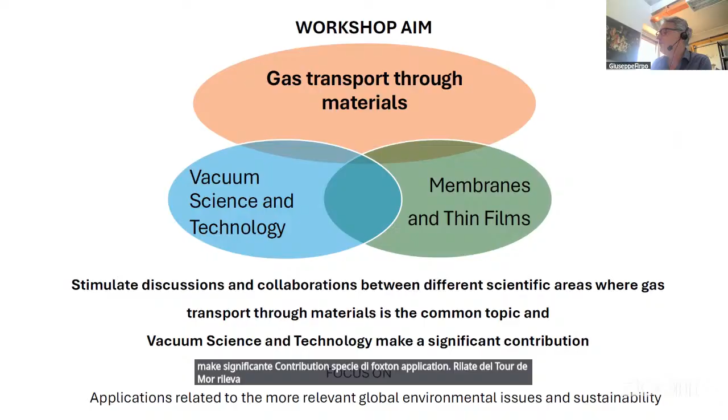The workshop aims to stimulate discussion and collaboration between different scientific areas where gas transport through materials is a common topic, and vacuum science and technology make significant contributions, especially focused on applications related to the more relevant global environmental issues and sustainability. These are the main topics.

Gas transport models, a theoretical part with dense and porous materials, phenomena of absorption and desorption at surfaces, and then applications in vacuum science and technology like insulation, component characterization, and outgassing, as well as in membrane and thin film technology, for example hydrogen storage, CO2 capture, gas separation, food packaging, and so on.

This is just a quick reminder.

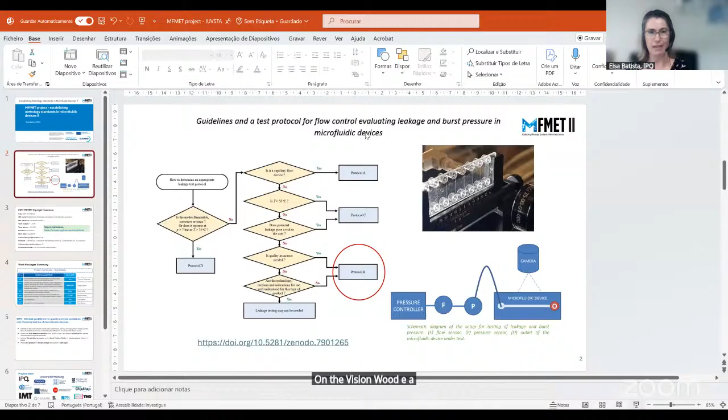Your question is interesting because I can answer in two parts. First, you are correct, I am the coordinator of a project entitled Establishing Metrology Standards in Microfluidic Devices.

This is the second time we got funds for this project. We had a project that lasted 3 years, ending in May last year. Now we got funds again from EURAMET, the European Association of Metrology Institutes, to continue the investigation in this work. In the previous project, as you can see from this slide, we developed a guideline for testing leakage and burst pressure in microfluidic devices.

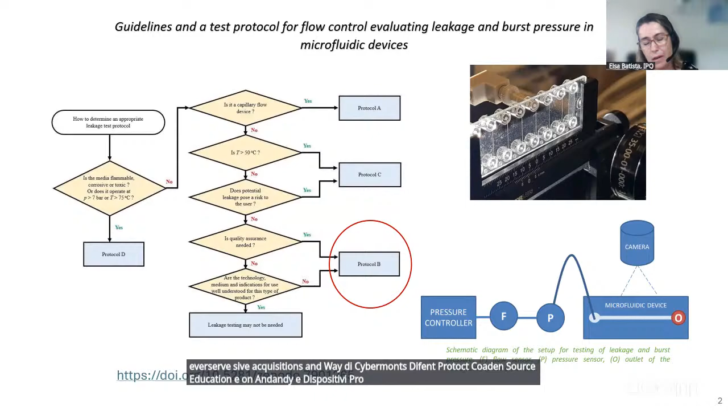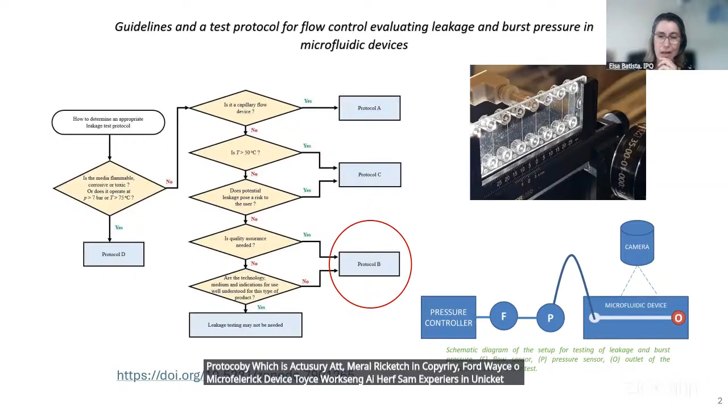So as you were saying, I have some experience with leakage of liquid in microfluidic devices made of polymer, which is Topas, and also made of glass and PDMS. From this protocol, we actually measured

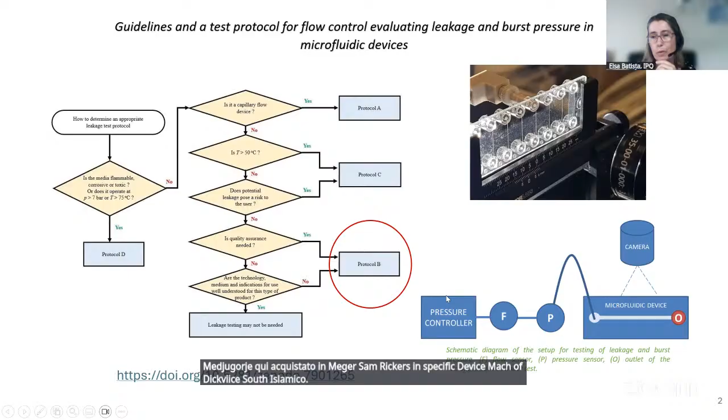This work was actually one of the deliverables of the project, and there is a link here where you can get all the information. So I have some theoretical experience on leakage, mainly in liquids, but in gas I actually don't have any.

It was interesting that you gave me this challenge, because I could see that it really fits within this new project, which is the second part of the MFMET project, and it has just started.

We have some... I think Federica, we need to, can you mute her, Giuseppe? Yeah.

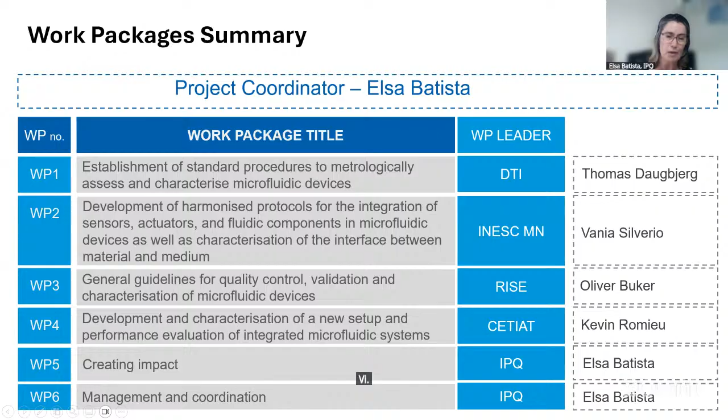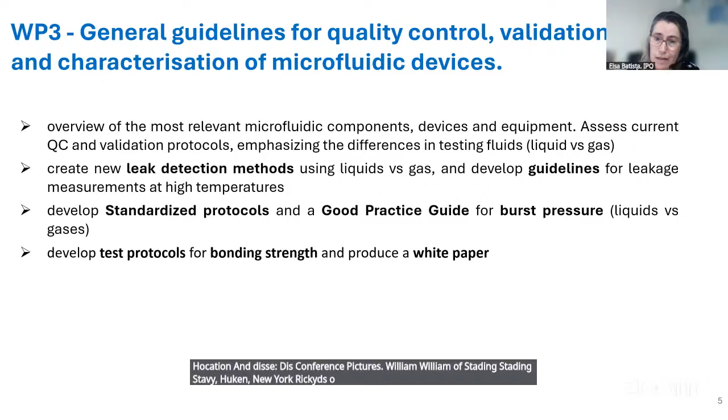For this project that just started in June, which I'm also coordinating, we now have one work package on general guidelines for quality control, validation, and characterization of microfluidic devices. Within this, we have a specific issue: leak detection methods using liquids versus gases, and developing a guideline for measurements at high temperature. This is where it fits with your question and this conference, because we are starting to study how we can measure leakage of liquids using gas, and then make theoretical calculations to convert leakage from gas to liquid. So we'll have a special work package related to this.

It's something new, we've never tried it before, so it's completely new. We just started the work. In my presentation in October, I think I'll have more information to give you, because we will start the investigations now, and within six months I think we'll have more to show you. But at least I can show you the part on liquid leakage — that is something we have already done.

For gas it's really new, but we're very excited, and we have a lot of experts from PTB in Germany, and also INRIM in Italy, who are really used to working with gas. We're talking about leakage on the order of 1 microliter per hour or less — very small quantities — and they are used to measuring this kind of flow rate for very small quantities.

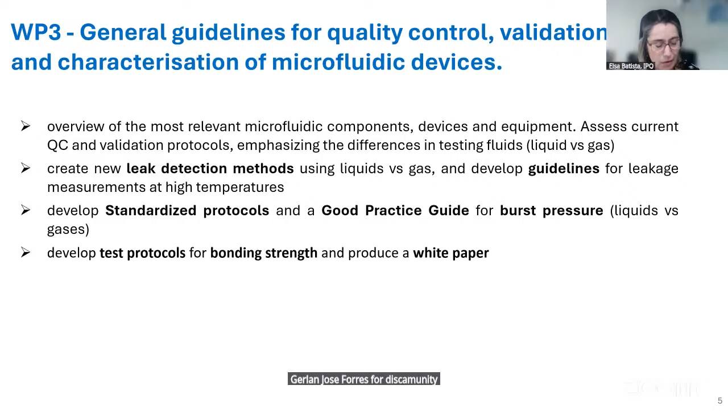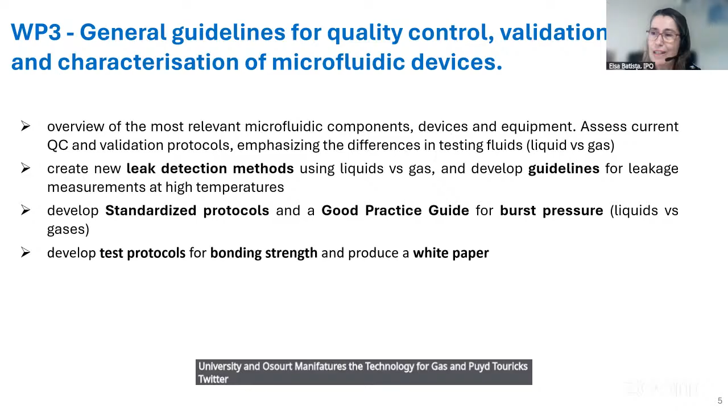So we're now going even smaller. It's a challenge also for us, for this community of national metrology institutes, universities, and also some manufacturers of chips, to try to take the technology used for gas and apply it to liquid leakage, and see if it works. It's really a challenge and a risk we are taking. But maybe even during this workshop or conference we can get some ideas in case we're not following the right path. So my presentation will focus on two things: first, the part on liquid leakage, and then the challenge of liquid versus gas.

Thank you, Elsa. It's very interesting, and I'm looking forward to seeing you in Portofino next October. Very interesting.

If Hajime Yoshida is not still with us, I can introduce Paolo Chiggiato. Paolo Chiggiato is a vacuum and material engineer at CERN, Geneva, Switzerland, where he holds the role of Deputy Head of Technology Department, Group Leader, and Program Coordinator of the Einstein Telescope, with recognized international experience in vacuum technology, thin films, surface finishing, and thermal treatments.

Wow, thank you Giuseppe. I hope you can hear me. Yes, thank you. So I have a small presentation here, a short presentation for you. Let me know if I have to swap. I think yes, okay.

The problem of measuring low rates of gas release is not only a matter of hydrogen from stainless steel or fired stainless steel — it's also a problem that is quite general in vacuum technology. Here you see an example. Maybe I have to use the pointer — where is it? Yes, we see it, at the bottom. Yeah, okay.

Here you can see the typical outgassing rate, measured in torr-liter per second per square centimeter, of a slab of different variable thickness for hydrogen after firing at 950 degrees for 2 hours in a furnace, with an ultimate hydrogen pressure of 10 to the minus 5 torr at that temperature. What you see is that when the slab is thin, lower than 5 millimeters, you have an outgassing rate in the 10 to minus 15 millibar liter per second range.

Another typical case that is quite interesting in accelerators or systems massively pumped by non-evaporable getters is the release of noble gases, because noble gases are not pumped by the getter. Here you see that we can measure, as a function of temperature, the release of krypton from a film of titanium, zirconium, vanadium. We can measure something of the order of log 10 to the minus 19 - with a quite elaborate process, something like 5 molecules of krypton per second per square centimeter. This is feasible.

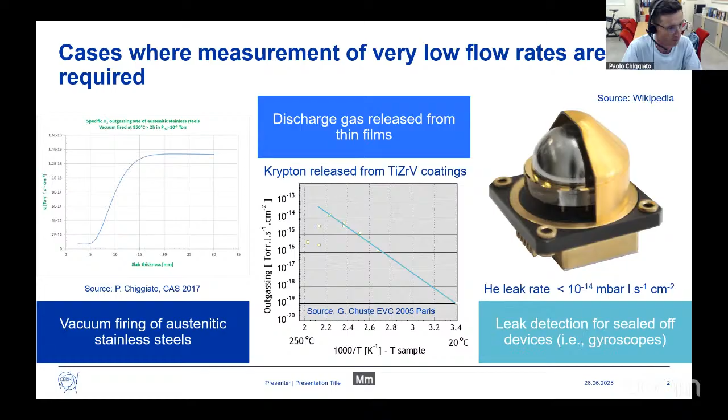So now, the point is that the techniques generally used for the measurement of the outgassing rate do not work for such values of outgassing rate.

The very standard is the accumulation method, where you monitor the pressure continuously during the accumulation of the gas. In general, you have a linear increase for gases that are not adsorbed by the wall of the system. The system has some intrinsic limitations. For example, you cannot measure the composition of the gas, so you collect everything. The sensitivity is limited by the outgassing rate of the vessel and also by the gauge. And as I told you before, if you have a species like water vapor, which is very interesting to measure in terms of outgassing, you cannot measure it because there is continuous pumping, so you attain an equilibrium pressure between what is released and what is adsorbed.

The other method is the throughput method. Here you have your sample or a chamber attached to this flange, and you measure the delta P through a conductance of a known value. So the outgassing rate is the difference of pressure multiplied by the conductance, divided by the surface area. In this system, the sensitivity is strongly limited by the fact that you have gauges that degas a lot. Even the best gauge degasses as much as a square meter of fired austenitic stainless steel. Also, the vessel around the sample can have a contribution which is important.

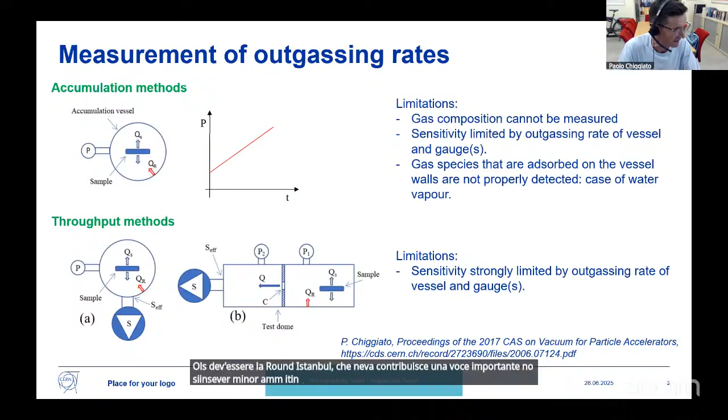Since 1995, here at CERN, we use a method which is a combination of the two, and in some sort we can avoid most of the problems I mentioned before. What we have is a vessel that can also be the sample, if we needed to measure the vessel, which is extremely degassed as much as we can - vacuum fired, air fired, whatever it is. This sample is connected to a measurement system by a valve which is itself vacuum fired to attain a very, very low outgassing rate.

This is a variable leak valve, so you can open the valve very slowly. What we do, in general, is put the sample there as much as we can - if the outgassing rate is very low, or we simply use the sample as the chamber for which we have to measure the outgassing rate. We bake, we pump continuously, and then at a certain time we close this valve and let the gas accumulate. So the only gas accumulated here is the gas coming from the sample, the gas coming from the vessel, and the gas coming from the back part of the valve.

So for those knowing the Pfeiffer variable leak valve, it's the sapphire of the valve.

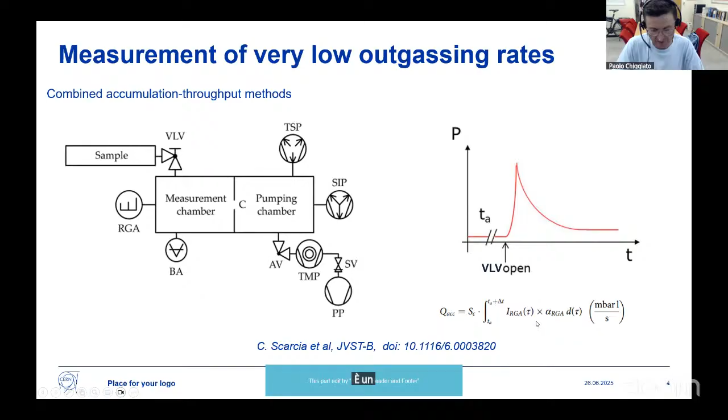We integrate the signal, we multiply by the sensitivity of the gas analyzer, and we multiply by the pumping speed of this conductance, which has to be lower with respect to the pumping speed that we apply behind it. And with these tricks, we can measure the gassing rate.

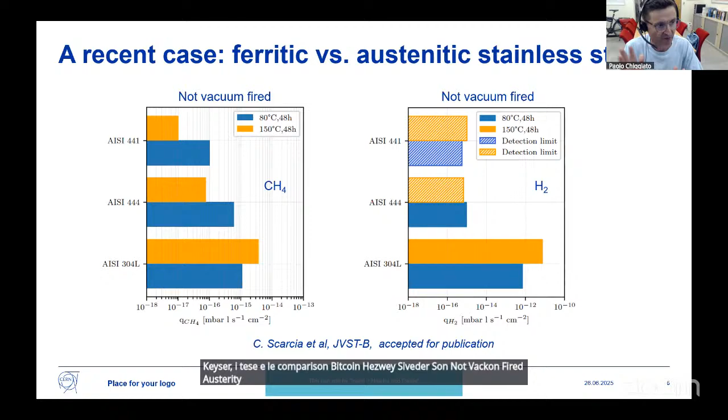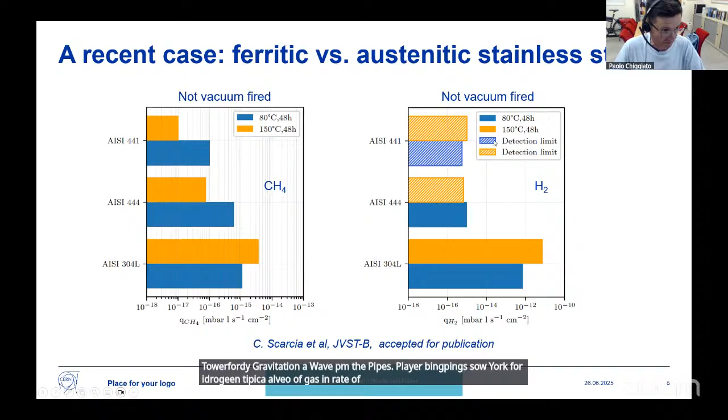This is the most recent case. It is the comparison between as-received, so not vacuum fired, austenitic and ferritic stainless steel. This is work that we do for the gravitational wave beam pipes, laser beam pipes. So you see, for hydrogen, typical value of gassing rate of 304 is in the 10 to the minus 12 millibar liter per second.

By the way, here we see also that increasing the bakeout temperature, the degassing rate increases. This is a very well-known phenomenon. It's due to the hindering of the release by iron oxide on the surface of 304.

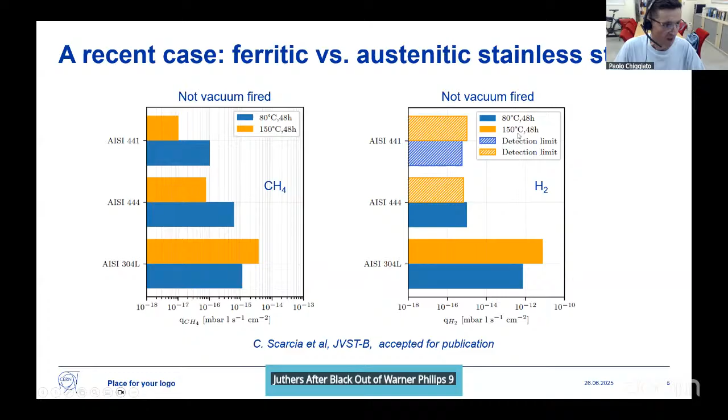Sorry, a question: this graph, temperatures at 150 degrees? Is this the bakeout treatment? No, this is room temperature. Room temperature after bakeout of 150 degrees. Yes. Okay, so for the 444, which is an alloy of ferritic steel,

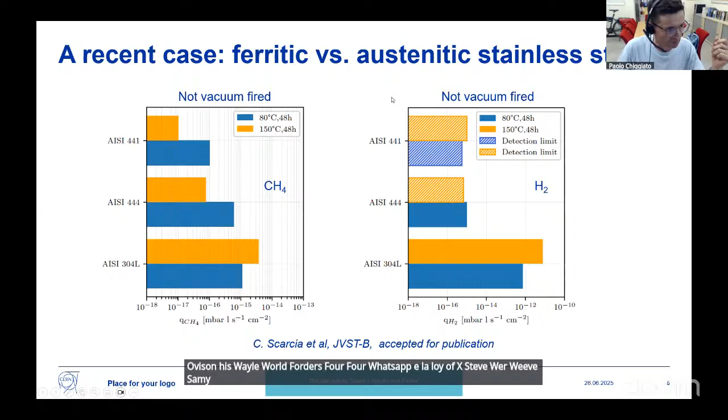where we have some niobium, titanium, some stabilizer of the ferritic structure, you see that the degassing rate that we measure is in the order of 10 to the minus 15.

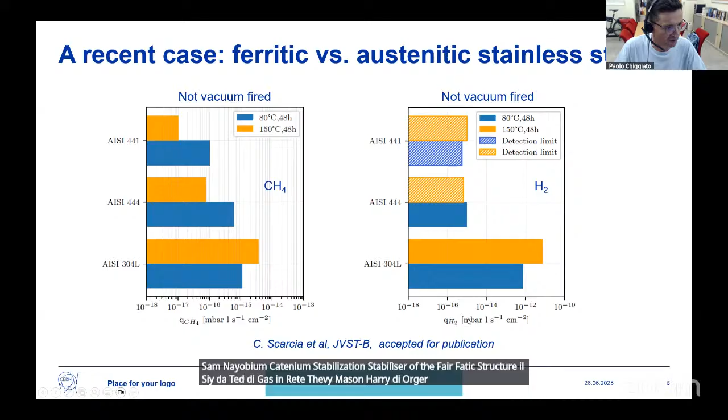Unfortunately, with the system that I showed before, we have an intrinsic limitation at, I think, 8 or 10 to the minus 16 millibar liter per second. And what we measure is exactly the background. So this is the reason why we put here the detection limit.

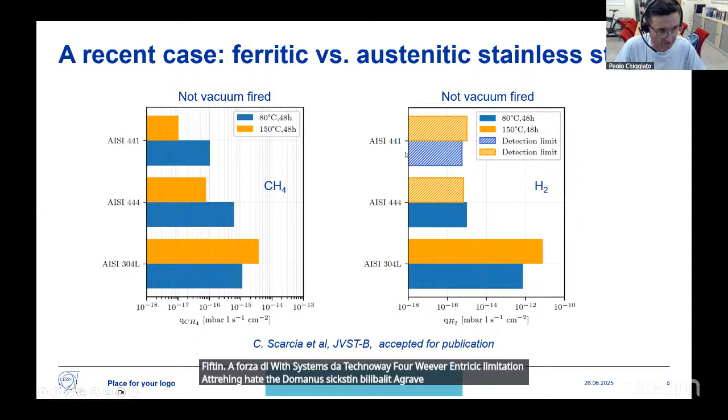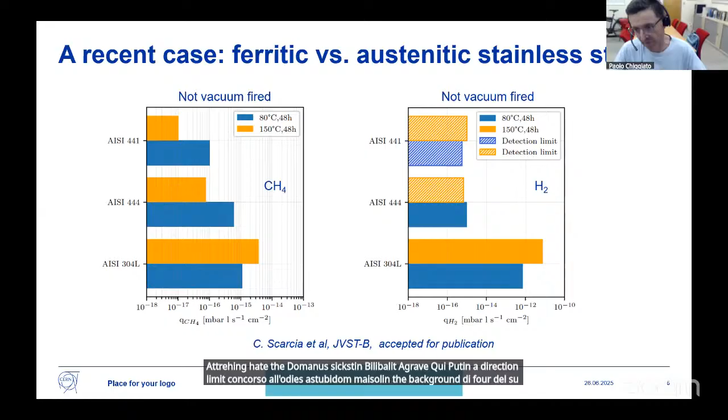Of course, all this has to be done measuring the background before, and then subtracting the value of the gas. The same has been done with CH4, and with CH4 the background level is much lower. You see that we can measure values of something like 10 to the minus 17 millibar liter per second, so the order of a few hundred molecules of methane released per square centimeter per second.

Okay, this is the way we do it in general.

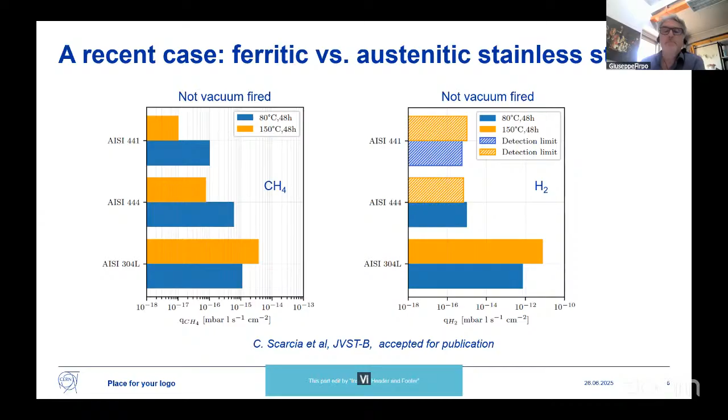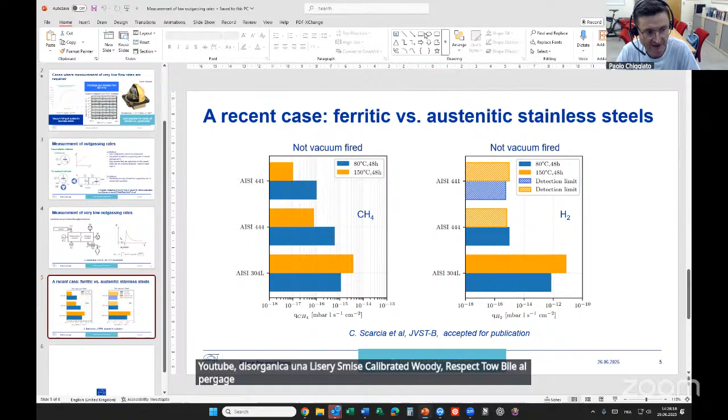So the gauge is calibrated, the RGA, the residual gas analyzer, is calibrated with respect to a Bayard-Alpert gauge, which is calibrated by the PTB in Berlin. So it's a transfer with pure gases. Let's say that we are operationally oriented, not metrologically oriented, so for us an error of factor of 2 is simply irrelevant.

Okay, we are not metrological. So for us to measure a degassing rate of 2 times 10 to the minus 15 or 3 times 10 to the minus 15 is nearly equivalent. What is important is that we can compare material with the same system.

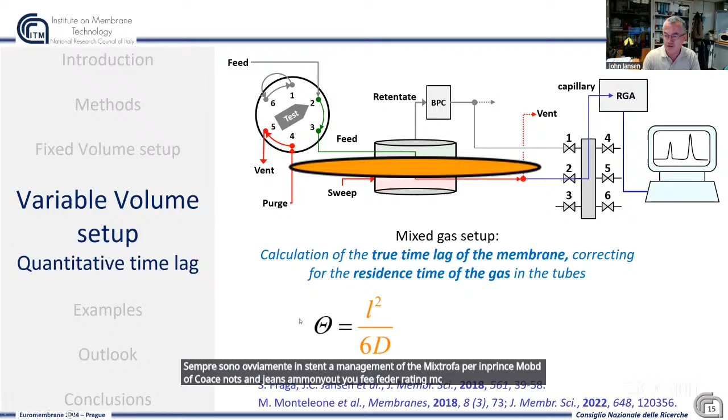In principle - but of course not. Engineers among you will know... If you want to know what the membrane does, you must realize that when you expose the membrane to the gas, the feeding system has some delay, which is simply the volume divided by the flow rate of the piping.

Of course, we optimize that. At the permeate side we have the same - the volume of the piping divided by the flow rate. Then the slowest part is actually what happens inside the analyzer, because there's a capillary in the mass spectrometer to sample really small amounts.

We found a way to quantify all that. We know the delay caused by the system, and then we can subtract the delay from all our measurements and finally come back to the time lag of our membrane, which gives the diffusion coefficient. That makes this system unique, because everybody can measure a permeability.

That's nothing really complicated. But if you are really able to measure the time dependence of your signal, then you can also get the diffusion coefficient of your gas through the membrane.

And that's still not unique, but if you have a mixture and you measure with a mass spectrometer, you see both gases. You know what you feed, you see what you get out of it, and you can see the time dependence, the transient phenomena of both gases in the system, and from that you can calculate the diffusion coefficient of two gases that move at the same time through a material.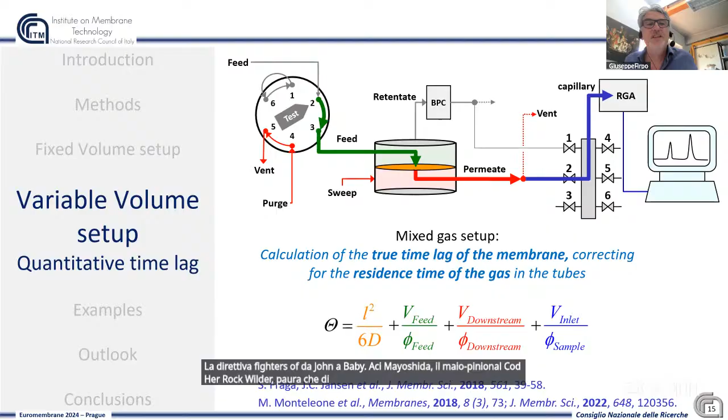Anyway, maybe Hajime Yoshida, in my opinion, could have gotten the hour wrong, but maybe he'll appear at 3 o'clock. I don't know. Anyway, joining us now...

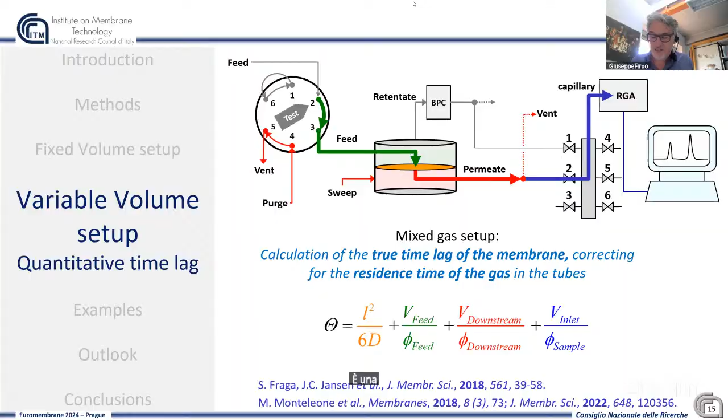Orlando will speak with us about cork, another very interesting topic. You have expertise in the metrology and modeling of gas transport through cork closures. I'm curious to know what are the main mechanisms of gas transport in these materials: Knudsen flow, phase diffusion, or solution diffusion? Thank you very much for this opportunity and for your question.

Some time ago we did some work on cork, and more recently on whole cork stoppers. One of the things we addressed was how the gas was transported in cork. We used small slices to measure the permeation, and to answer quickly your question, we found Knudsen diffusion mechanism for transport.

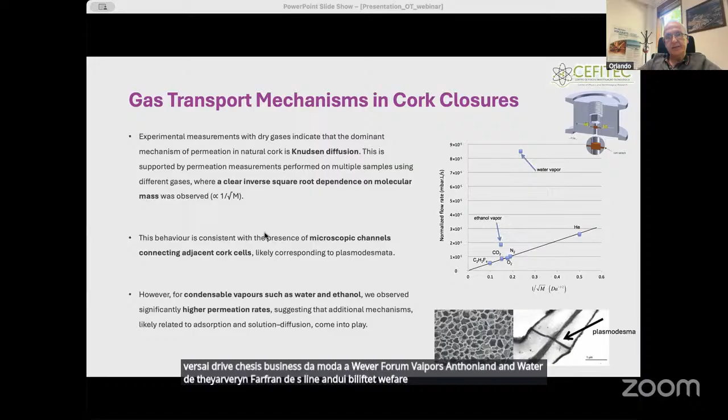We believe we have a second mechanism by solution diffusion. Water, for instance, has a huge affinity with cellulose, which is one of the main components of cork. So it's understandable that we have another route for water transport. But for dry gases—and oxygen is the most interesting for this application—we believe at least our data is consistent with the Knudsen model.

Cork, just to remind, is like a foam. It's a series of empty cells with gas inside. They are tight, flexible, but closed. What we see in this picture is not pores—we cannot call these pores. They are cells, and they are closed.

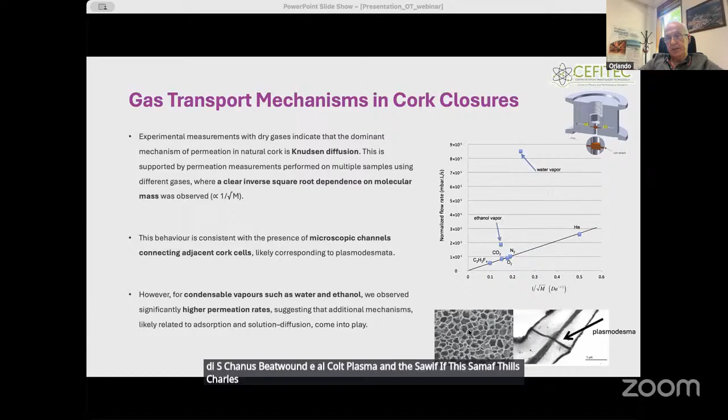But they connect to each other by small channels found in nature, in plant cells. These channels between cells are well known—they are called plasmodesmata. If some of these small channels, below 100 nanometers, are open or unclogged, the cells of cork are empty of cytoplasm—the inner part of the cell was removed during cork growth, and only air remained inside. So if some of these small channels are still open, they can explain this nice dependence, this Knudsen diffusion, as we observed.

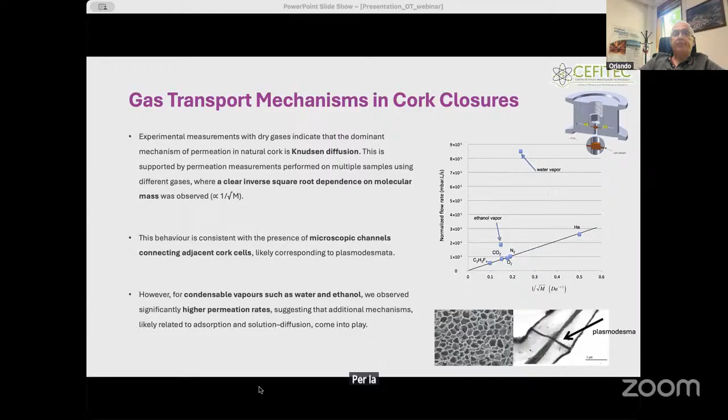But besides measuring the permeability, there are at least 3 key challenges that are very, very important.

Many other authors measure the permeation, the permeability of cork, and they also found a huge sample-to-sample variability. So we can find samples, even carefully selected slices without any visual defect, with distributions spanning over 2 to 3 orders of magnitude. It was very difficult to draw conclusions on standard deviations, since in these cases the standard deviation was even higher than the mean, so not much conclusion we could take from that.

However, in whole cork stoppers, the scenario is better, since the cells are compressed and they span over fewer orders of magnitude. But in that case, we believe that the measurements we can make in whole cork stoppers are due to leaks, not to true permeation.

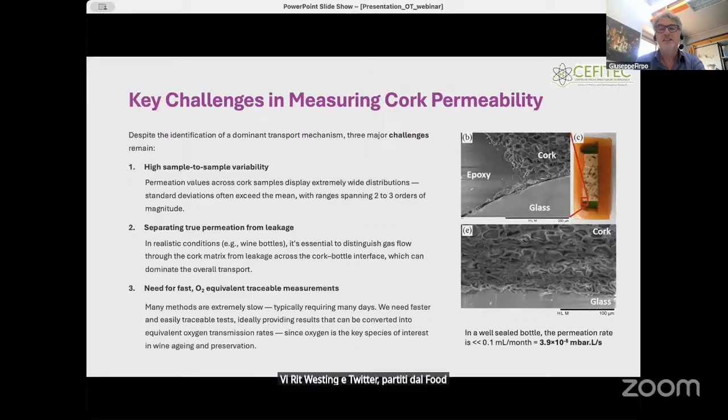Very interesting, it's also in particular for the Italian wine company. This is this study.

Unfortunately, we can't see our Japanese colleague still. Now it's time for your questions, and I can see the first question in the chat by Julian Gargiulo. Julian, do you want to say your question, or do you prefer that I speak? It's a question for Paolo and Carlo.

Julian asked: thanks for the presentation, and asked why we have chosen methane, since it's considered predominant as outgassing besides hydrogen. Paolo or Carlo, maybe you can answer.

In fact, I showed two gases, hydrogen and methane. Hydrogen is very important because it's the dominant gas released from steels, whatever the steel. Methane is important because it is not pumped by non-evaporable getters, and today accelerators, and in the future probably gravitational wave systems, will be massively pumped by non-evaporable getters. So showing CH4 is important because it allows designing the pumping speed for systems that are not non-evaporable getter based, for example ion pumps. So these are the most important gases.

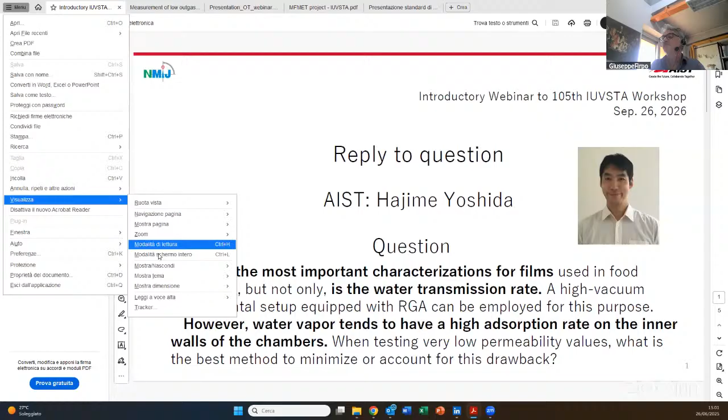Okay, if you want, I can share the slide. Can you see my slide? Yes, I can. Okay, this is the question. So I move to the next slide, please.

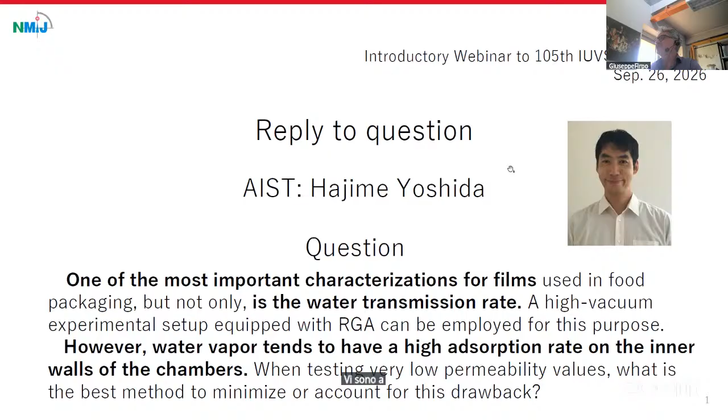In the accumulation method, the valve between the vacuum chamber and vacuum pump is closed. Then the pressure in the vacuum chamber keeps increasing, which causes an integral type permeation curve. The WVTR is calculated from this slope. In the throughput method, the vacuum chamber is continuously evacuated by the vacuum pump. Then the pressure in the vacuum chamber first increases and finally reaches stable saturation. WVTR is calculated from that. Please go to next slide.

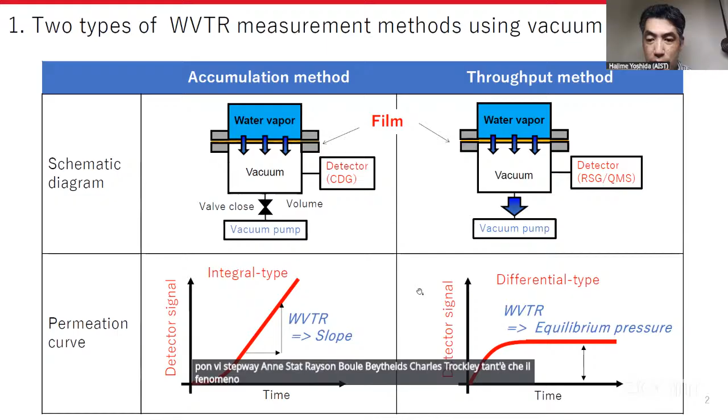Adsorption is different between the two methods. In the throughput method, shown on the right-hand side, pressure equilibrium is realized, meaning the adsorption rate onto the vacuum chamber is balanced with the desorption rate from the vacuum chamber, so the net adsorption rate becomes zero. In other words, the influence of water vapor adsorption is cancelled out due to realizing equilibrium pressure. Therefore, accurate WVTR measurements can be achieved.

In the accumulation method, however, the water vapor pressure keeps increasing. Therefore, the adsorption rate onto the vacuum chamber is always higher than the desorption rate from the vacuum chamber, so the net adsorption of water vapor may cause underestimation of the WVTR.

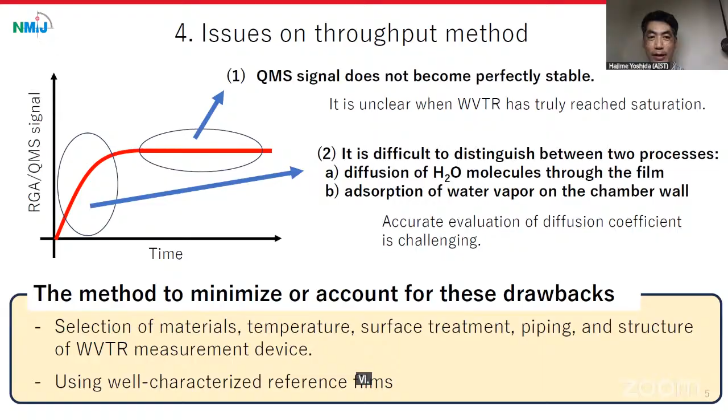The method to minimize or account for these drawbacks is a question I've received from Giuseppe. Yes, it is a very difficult question, and I don't have a clear answer. But in general, selection of material, temperature, surface treatment, piping, and the structure of the WVTR measurement device is important. Also, using well-characterized reference films is useful. But I don't have a clear answer yet, I'd like to find some tips at this workshop.

Have you ever heated the chamber to decrease the adsorption rate of water during measurements, or not? Yes, I typically keep the temperature of the vacuum chamber at 40 degrees C. A little bit higher than room temperature. I have tried higher temperatures, but it doesn't work well. I don't know, yeah. It's very challenging, yes. Anyway, thank you, Hajime.

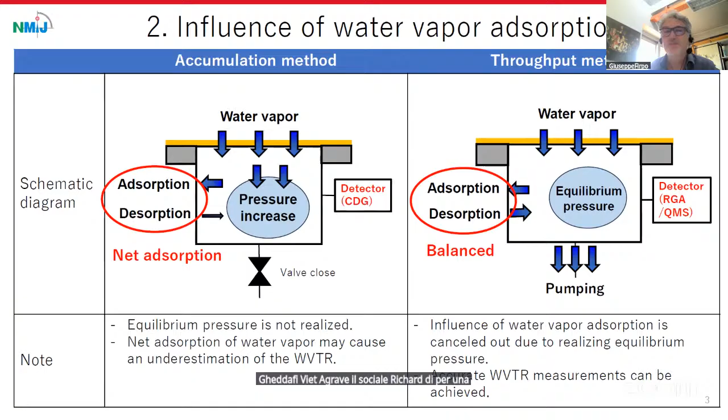Have you questions for Hajime or for other invited guests? Because we have the same problem measuring the outgassing rate of water when it is low. So the question is, have you ever thought about or tried coatings that can reduce the sticking or adsorption of water? We tested, with limited success, silicone coatings deposited by CVD.

Good idea. And in fact we can reduce the degassing rate of water by a factor of 10, which is good, but not enough to avoid the bakeout for us. Is there any chance there is a coating that can help you?

Thank you for your question. I've investigated many research papers about these techniques, but I have not tried yet. I am just using stainless steel, but it is polished like a mirror. It's all from my experience, but I have heard silica coatings sound good.